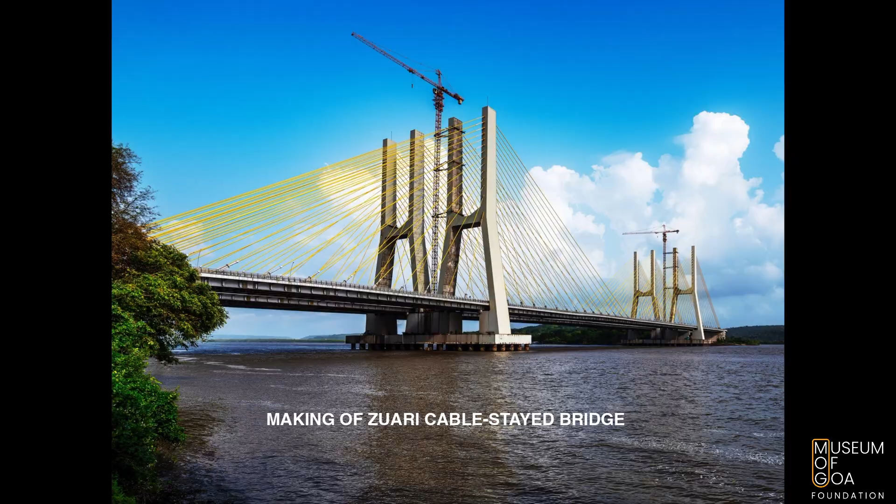So this bridge, as the name suggests, is a cable-stayed bridge. Some people even refer to it as a hanging bridge. Have you heard somebody calling this sort of cable bridge a hanging bridge? But in engineering terms, there is nothing called a hanging bridge. With cables, we normally construct only two types of bridges: one is the cable-stay, and the other is the suspension cable bridge. So these are the two types, but as an engineer, we never refer to it as a hanging bridge.

Now Goa has three other such cable-stay bridges. Do we all know about them and have we seen them? One more we know is Mandovi. Then there are two more - Aldona is one. That was the first one, done around 2004, when it was first opened.

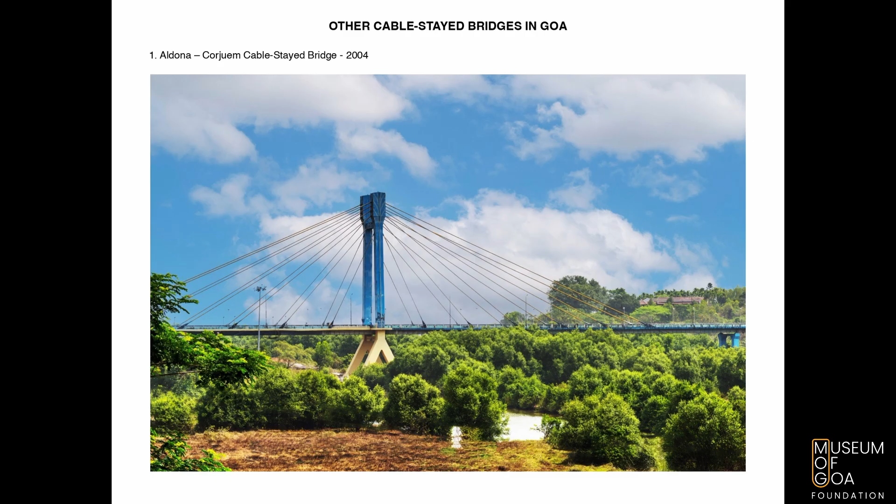So I will just show you quickly those two pictures also. This is Aldona, about 235 meters in length, with some 105 meters of navigational span on the right side. Then, of course, this is Mandovi.

Fortunately, I was also present in this project from the beginning. This is Mandovi, which was opened in 2019. Here the cable-stay part is 620 meters, whereas the bridge I'm going to talk about, Zuari, is 640 meters.

And the third one, other than this bridge, is from Sada to Varunapuri, in Vasco. But this bridge is not mainly for local traffic, it's mostly for the port. This way they are crossing the railway tracks as well as a road overbridge there - not a flyover. So these are the other three bridges here.

And of course, there is no suspension bridge in Goa. So now let us first talk a little bit about the difference between these two types of cable bridges: the suspension bridge and the cable-stay bridge. This is, of course, a bridge everyone knows - the Golden Gate Bridge.

So here the main difference is: you can see the cables which are taken up there, then going down, then some more cables hanging which are vertical - this is the suspension type. Those vertical cables are holding the deck, and the vertical load is transferred from this to the pylon, and through that it goes below to the ground.

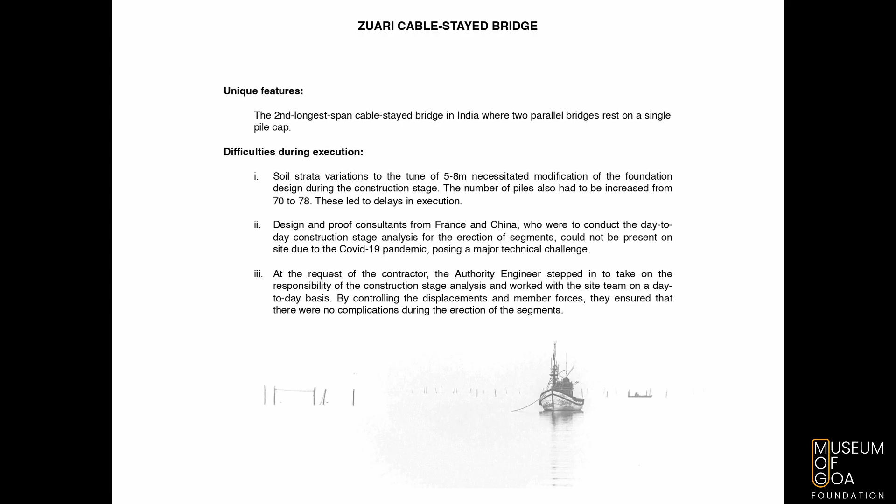At that time, when this bridge was completed, it was the second longest cable-stayed bridge in India. Now, of course, there are many more built in recent years. And there were a lot of problems while doing it.

The foundation size was huge, 89 meters by 27 meters by 4 meter depth. In that huge area, there was a lot of variation in the soil strata. When we started the work, we did some soil investigation, but being such a huge area, maybe the investigation should have been done at more locations. Because of that, we couldn't visualize how the strata change would happen, and the design had to be changed. While they were boring, we suddenly found the existing design would not work and needed more. So soil investigation was done again, which added to the time frame.

The bridge was designed in France, and the proof consultant for this bridge was from China. They were supposed to be here during the erection of the girders. At the time of erection, the bridge is always in an unbalanced condition, so every day calculations had to be done to tell how much force has to be given. This was not happening because those people were not here, due to COVID-19.

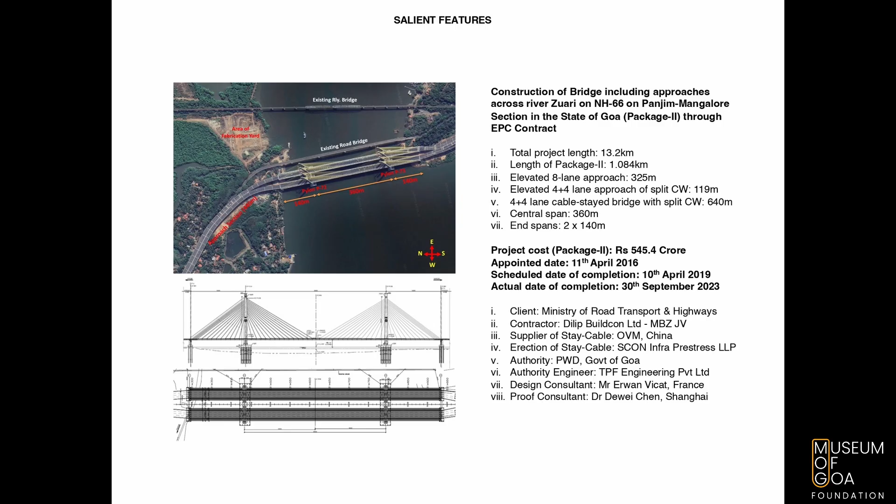I'll explain briefly since there are many things to cover. The total length of the bridge has a main central span of 360 meters, with 140 meters on either side, making 640 meters total length. This cost around 545 crores, with very little escalation, some 2 crores extra because they had to do something extra which was not in the contract.

This is what I was discussing earlier with a gentleman here. When this bridge was initially conceived, these towers were already under consideration and had to come up. When this proposal went to the ministry in Delhi for sanction of the project, they said no, we cannot give you money for this because it's a huge amount, almost half the cost of the bridge itself for these two towers.

They said, since the Goa government is going to earn revenue from this, we are not going to fund it. But since you have already taken these things into consideration while designing the bridge, you should design your foundations so that all the extra load coming from these towers can be taken care of, so that in future, whoever funds it can come and build on the same foundation. That's how the foundations became very big here.

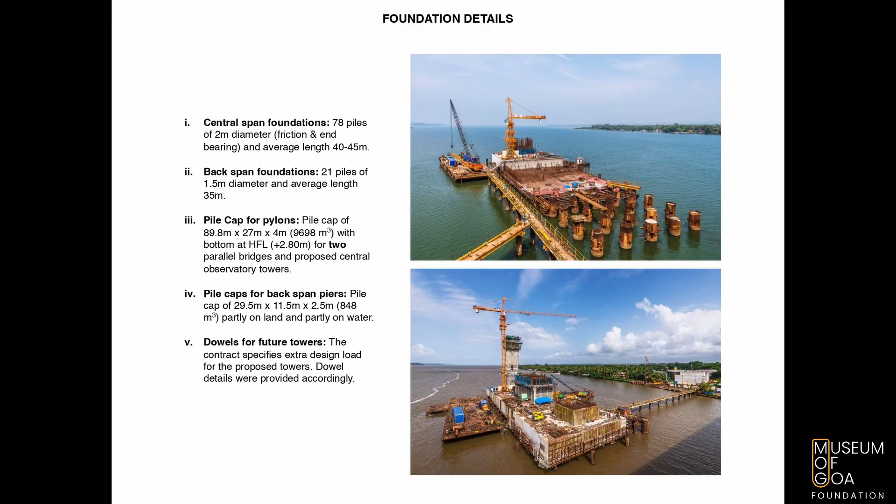Now let's come to the main bridge foundation. Both foundations shown in the photograph, the first one is on the Madgaon side, and the bottom one is on the Panjim side. These two huge pile caps are almost half the size of a football ground, 89.8 meters lengthwise, 27 meters widthwise, and 4 meters in height. It's a huge amount of concrete there.

Before that, we had to do the piling. The total number of piles in the original design was 70. Then, because of the variation in depth of the strata, we had to add another 8 piles in between, making it 78 piles total, along with the pile caps.

Notice that we couldn't pour the pile caps at one go for the entire thing, otherwise we'd have to wait for the whole thing to get complete. Also it would be a huge volume, about 10,000 cubic meters at one go, which is possible but it was easier to do it in 3 parts. So those were the changes we made during construction.

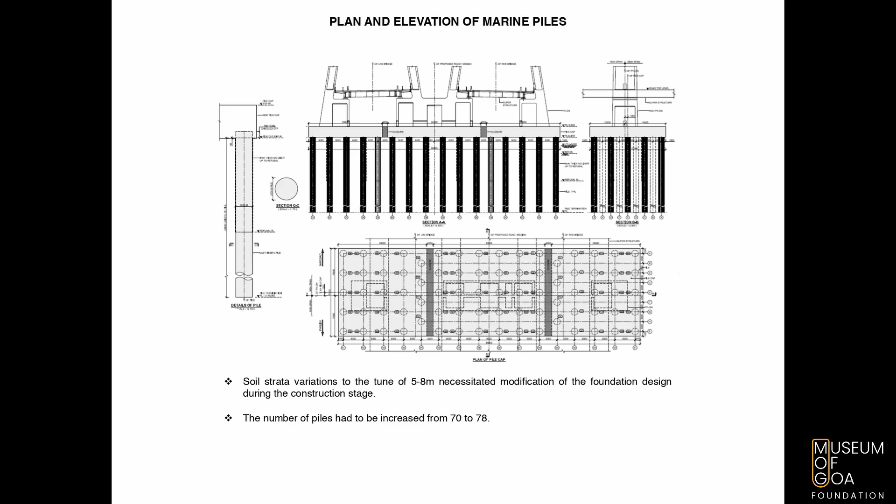This is the drawing of that. You can see there are 5 rows of piles this way and 14 rows the other way. In between we added 4 piles here and 4 here later, making it 78 piles total. These are huge piles of 2 meter diameter each.

So piles are like pillars? Yes, it's like a pillar, but inside the ground for the foundation, vertical.

Now we need to ascertain the capacity of each pile. While doing the soil investigation, we know the soil strata, and depending on that, if there's rock at the bottom, we call it an end-bearing pile which takes the majority of the load. Sometimes we design it as a friction pile combined with end-bearing. Here it was like that, both friction and end bearing.

From the soil investigation data, we could calculate how much load the friction would resist and how much from the bottom. Based on that capacity, we decided initially it would be 70 piles, but then we needed to confirm it by doing a test.

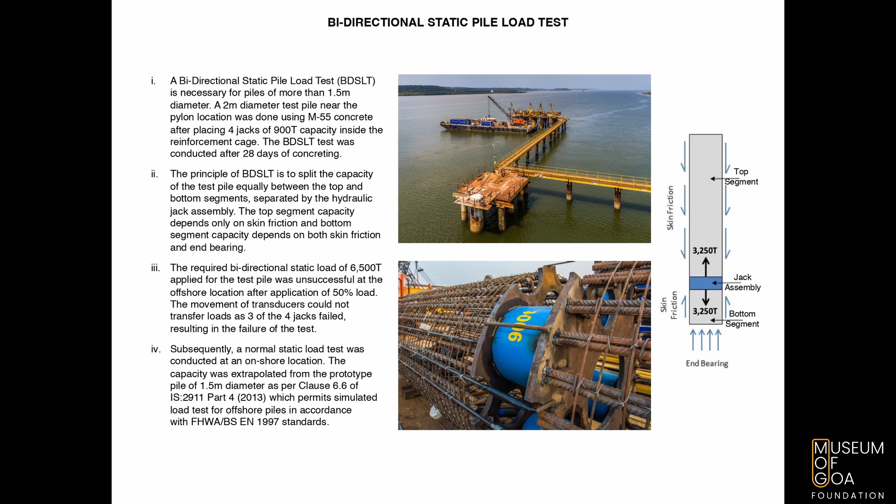This was one test that was done. Normally in bridges, piles smaller than 2 meters, up to 1.5 meters, are tested by loading a platform with weights, then putting a jack on top of the pile and applying load through the jack. The jack starts lifting the platform, and in turn the load gets transferred to the ground. That's how we used to do it.

But this was a different kind of mechanism. Here the jacks were put inside the pile. There were 4 jacks of 900-ton capacity, and this was our test pile, not in the main working area, a little away. This had to be done with full concreting, everything buried inside.

For whatever reason, maybe the electrical line got cut during concreting, this whole test failed, and we couldn't get any result from it. So we had to go for a prototype test instead, which is also allowed under our codal provision. We did that on a smaller pile outside, not inside the river, in similar soil strata, and extrapolated the results to get the capacity of the 2-meter diameter pile.

Is it becoming too technical now? A little bit. Okay, then I will go a little differently.

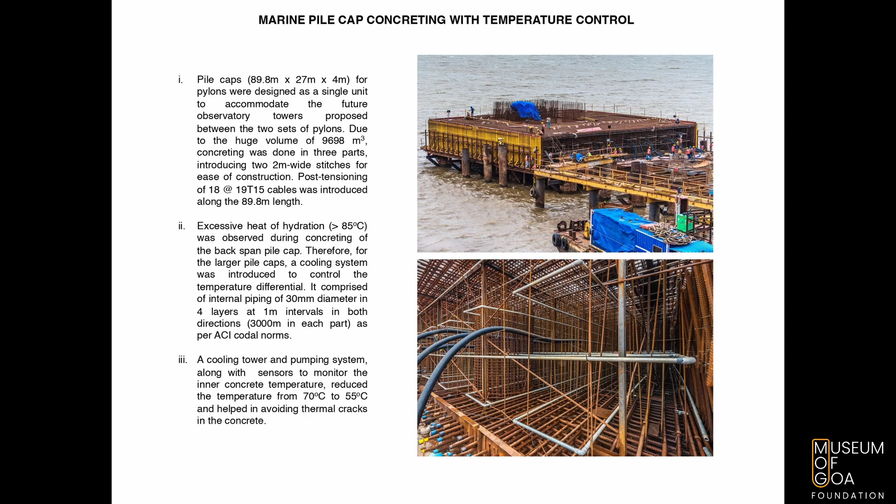Whatever I do on top doesn't help reduce the temperature inside, so this wasn't in our original plan, but we had to provide piping for pumping. We had ice cool water pumped through this piping so the concrete becomes cooler, preventing that heat of hydration and reducing the temperature difference, basically to avoid cracks in the concrete.

Since we did it in 3 parts, finally we had to put some cables here, which was originally not there in the design, to make it a monolithic kind of thing. That was also done, which came later.

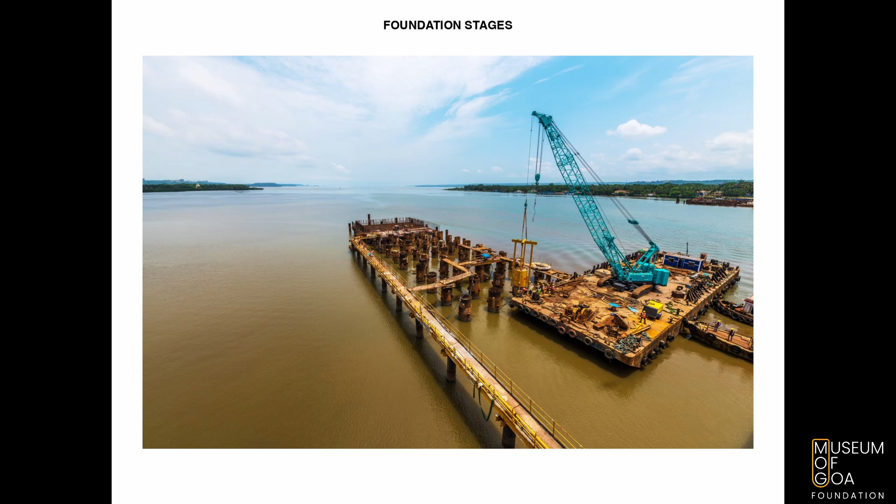I'll just show you some pictures. So this was initially we started piling. Then you can see the first part of even the pylon, this pile cap is done, even the pylon is starting. Then pile cap again we are getting it ready for the next, and here pilings are done.

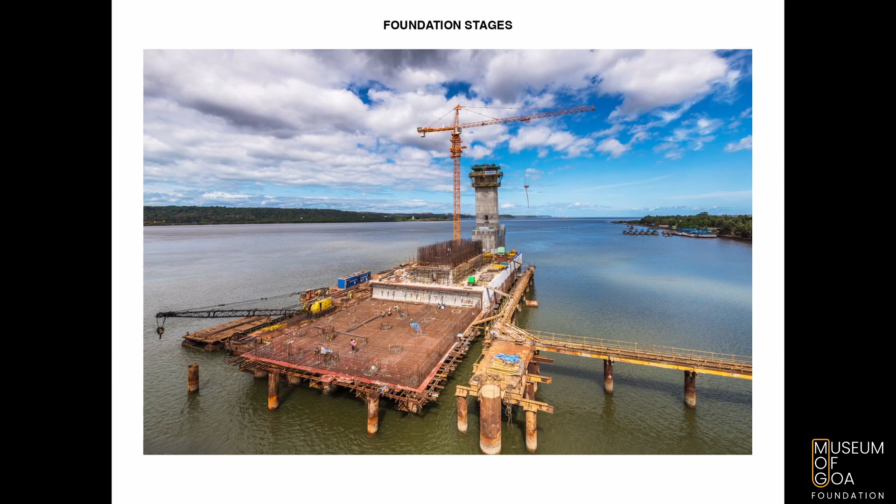And here also from the other side, the last part of the pile cap. Then here it is ready for concreting now. All these concretings were done through some pipelines. Everything was at the bank of the river, so it was pumped from there right into this.

While doing all this work at site, we had the huge things to be done, the superstructure and steel. So for that, we had to set up one fabrication yard near the site, and we'll just talk about that quickly. This was the facilities that was created there.

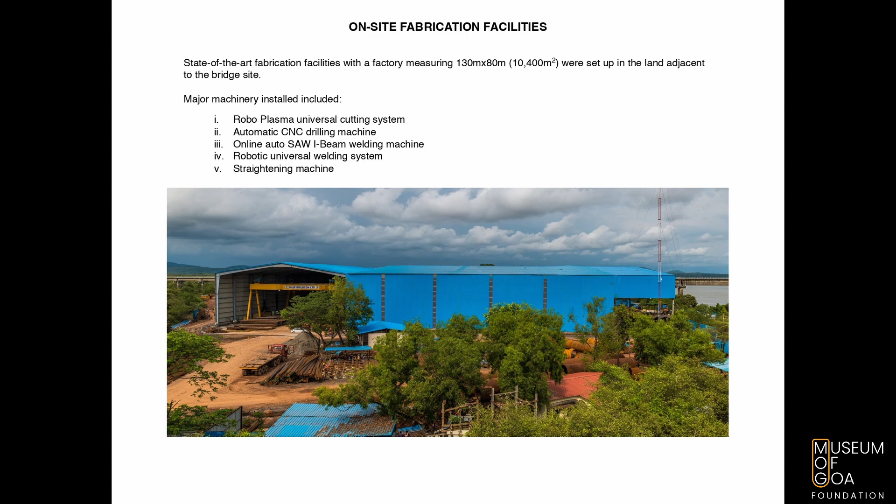This is about 10,400 square meters of area with some major machineries like this, for cutting, then drilling, then welding - all kinds of these machineries were all inside there, just adjacent to the site. This was the interior of the factory.

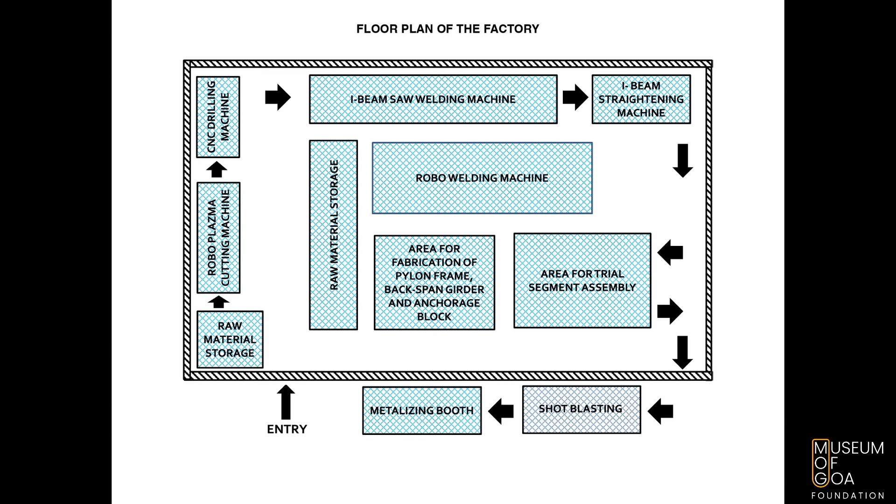There's another image - all these steel plates are kept there. And then this was the floor plan. From one side, the material used to come, and after cutting, drilling, then welding, it used to come out. Then it was again shot blasted - those I will show you in the photographs.

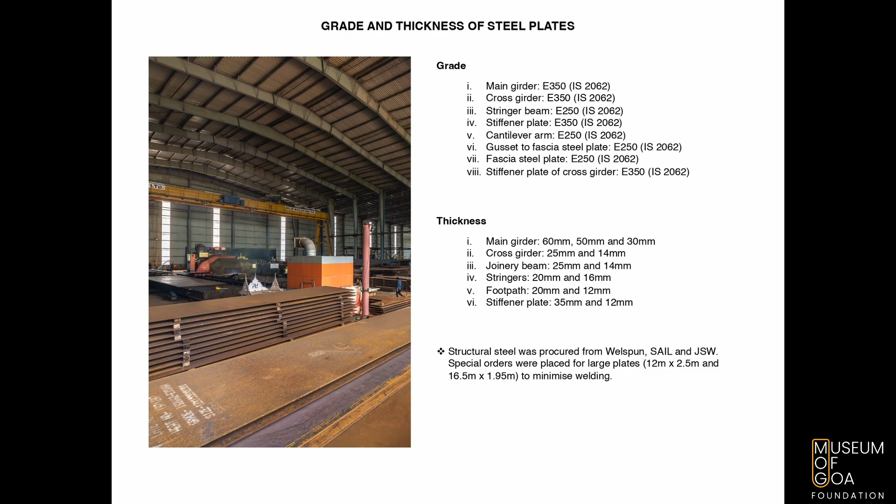With this, the machine used to decide how to cut the plate so that we can optimize and minimize the wastage of the steel. And this is the drilling machine.

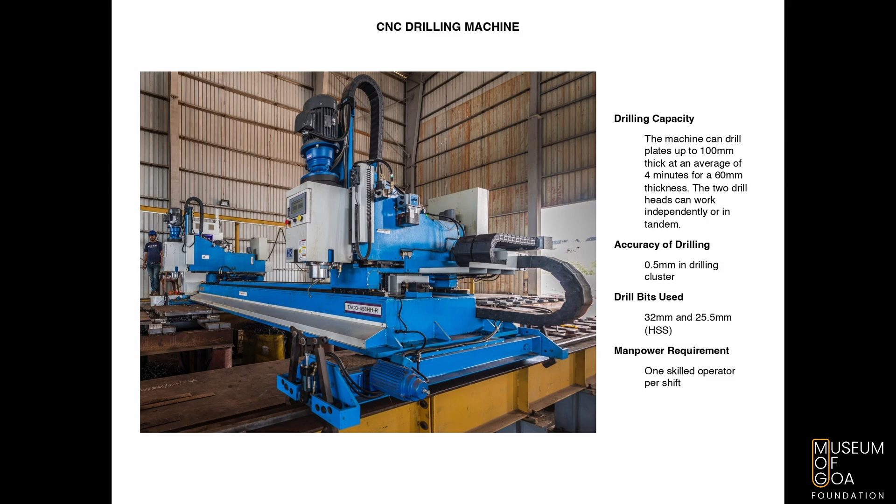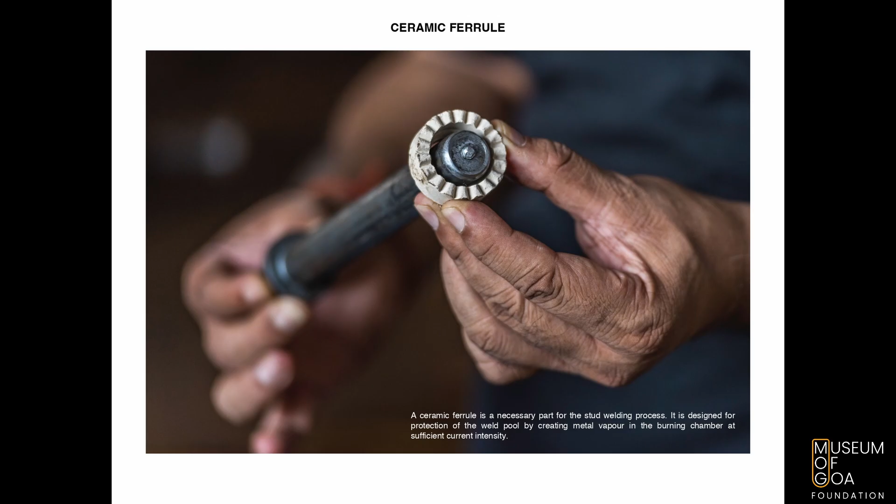And this is, at the start, there is something called a ceramic ferrule. So what happens is this point here melts, and also the material of that beam, or wherever you are connecting, also melts. But during melting, this just protects that area, so that it can fuse easily.

And this is the shot blasting happening here inside a closed chamber. We put some small metal shots with very high pressure, so that all the scaling and a little bit of rust comes out. Then you see, after the shot blasting is done, even the color of the steel has changed.

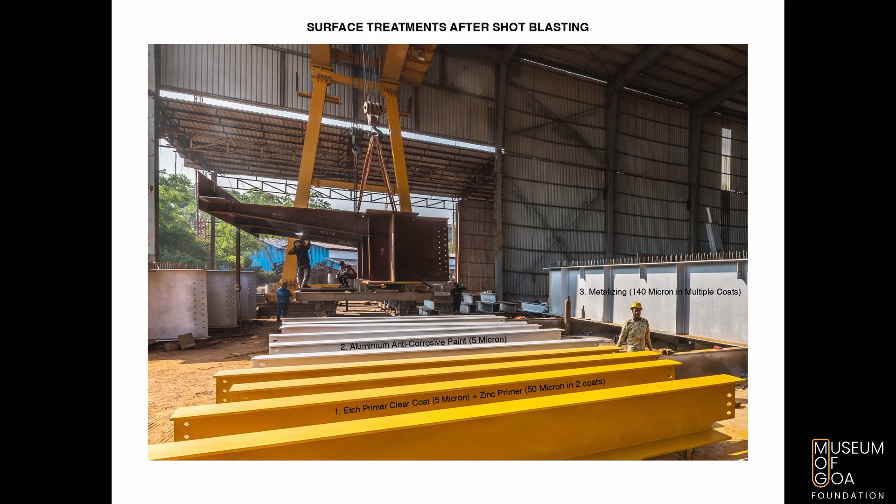Then we apply these different coats, the protective coats here. Then this is the last coating, this is metallizing - here this wire is getting melted, and with some air pressure, it is applied like paint there.

Now this is the pylon, as you have always seen in the bridge. I will just go quickly, okay? I will not explain too much of the technical thing. This was done in 3 parts.

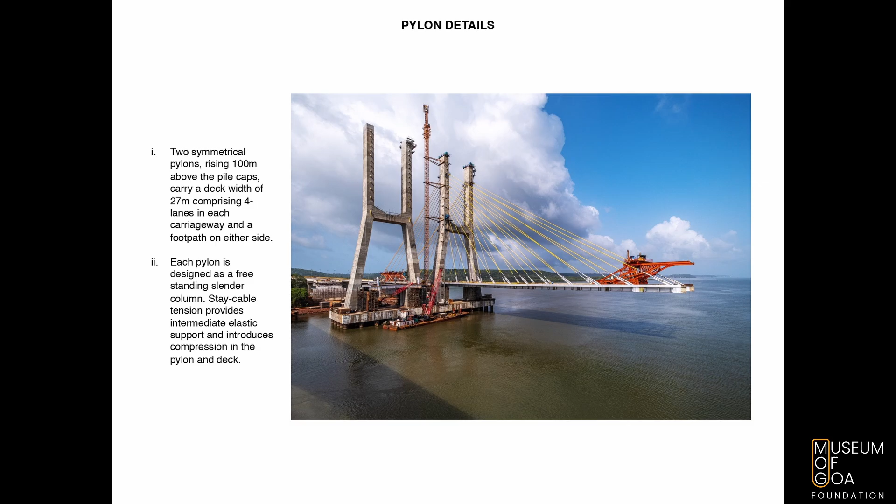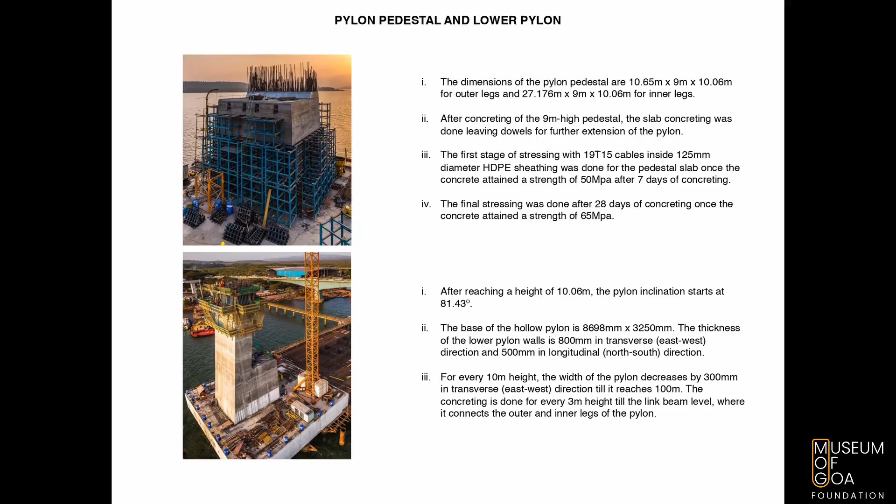This is the bottom part, we call it pedestal. Then this is the lower pylon, from the pedestal up to the tie beam level. There is a tie beam at the 50-meter level. So up to then, it is the lower pylon.

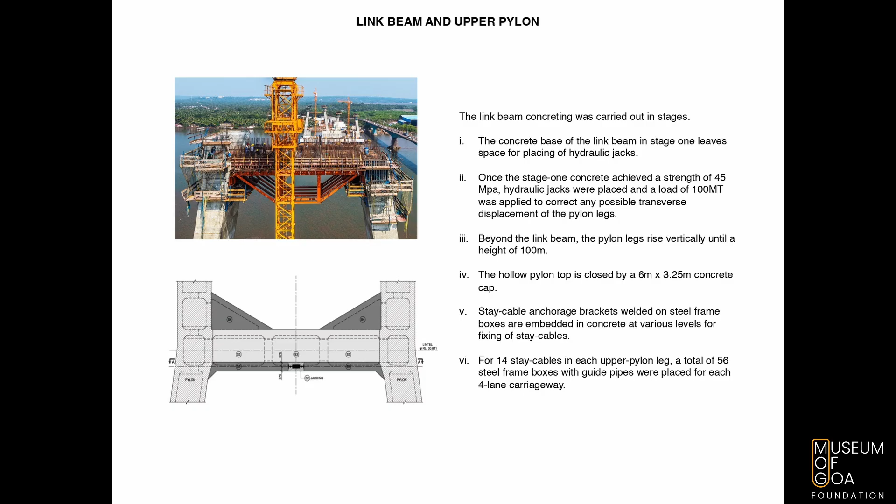Then it goes up. This is also, I am just showing the formwork of the pylon. Then here is the beam. By the time you come up to this beam level, because these 2 legs are inclined, there is a chance of them coming closer at the top.

Because of that, before we start doing this concreting, we put a jack here. We do 2 parts on both sides. Then with a hydraulic jack, we give force so that whatever correction we need to do is made before we go further, because we have to go another 50 meters above this level.

So we correct those things, and then finish this entire concrete and go ahead to the top. You were seeing those cables when you travel at the top, and also seeing the cables coming down. You see only this yellow part, right? Inside each pylon, there is a huge steel frame where all these cables are anchored. The stressing is also done from inside, because the entire pylon is hollow. From outside you cannot really make out whether it's hollow or solid.

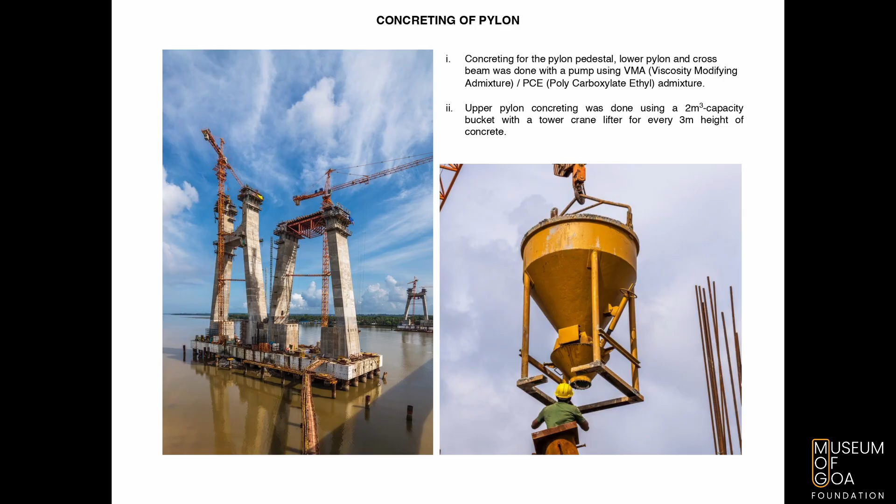And the concreting, as I told you, up to this 50-meter level, was all done by pipe, by hydraulic pumps. Above that, it was all done with buckets which were lifted through the crane, with some 2 cubic meter capacity buckets. Because these were all small lifts, we were doing 3 meters at one go.

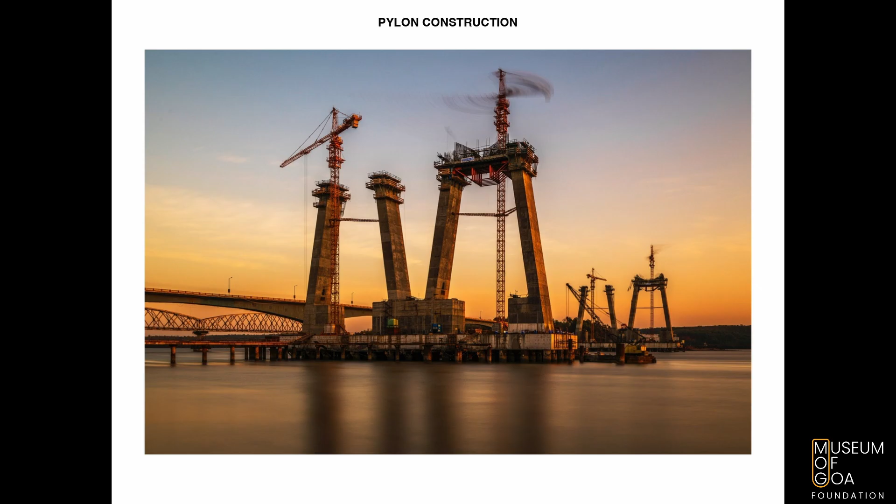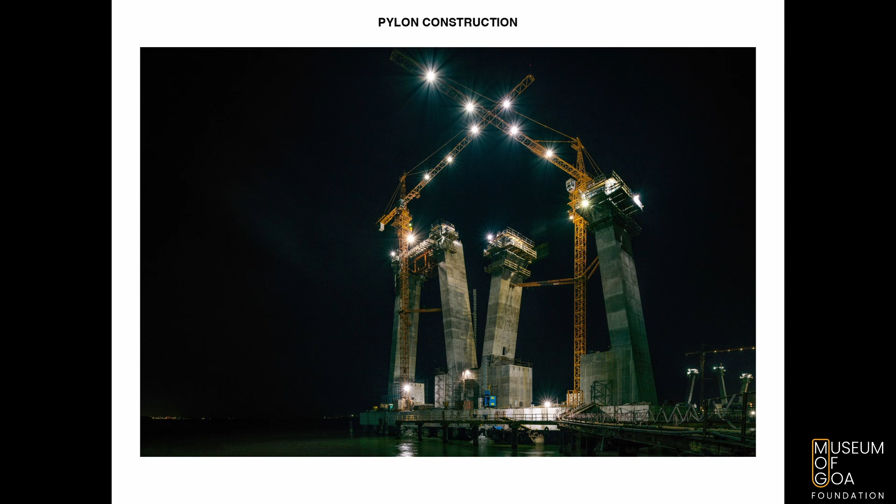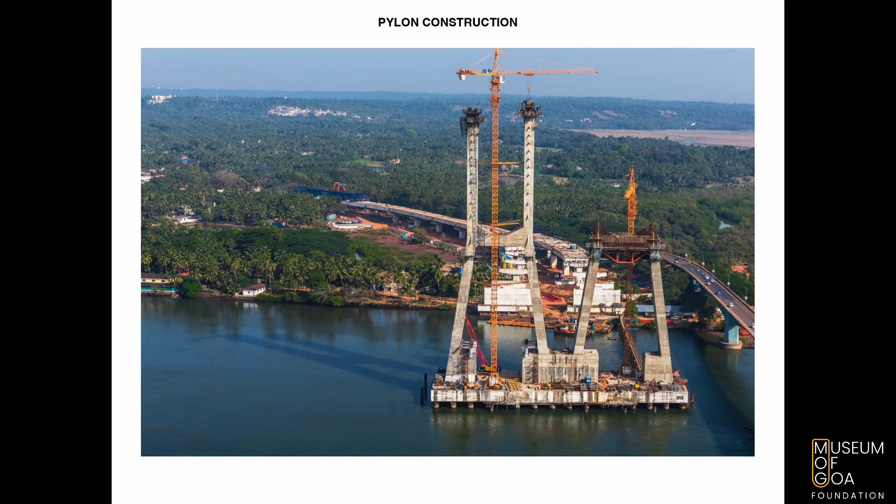Okay, we are now building the superstructure. Also, the elements are in the fabrication yard, inside the factory. And now I will just talk about the superstructure a little bit. When you travel and look at the bridge from the side, you really cannot make out that the beam is so high. This is 2 meters high.

You can see the man there - there is space up there. This is only a small part, the footpath area where the bridge has a footpath section. This is only for the footpath section, where the total width is 27 meters here.

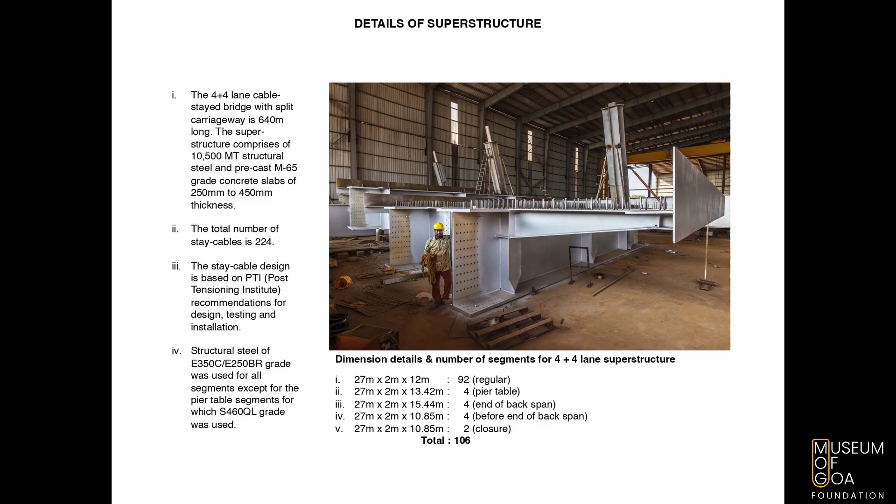And in total some 92 segments were done. Of the 106 in total, 92 were with a very regular dimension, which is 12 meter, 27 meter. Some of them were with a little different dimension to bring it to the correct length. So 106 segments in total, each about 100 tons. That much fabrication work was done there.

Finally, while designing, we have to design it for some drag coefficient and things like that. So whatever we assume while doing the initial design, that time we assume something, because for each area we already know the wind velocity. So based on that we do it, but we need to again confirm, depending on the section of my bridge. So these tests are done.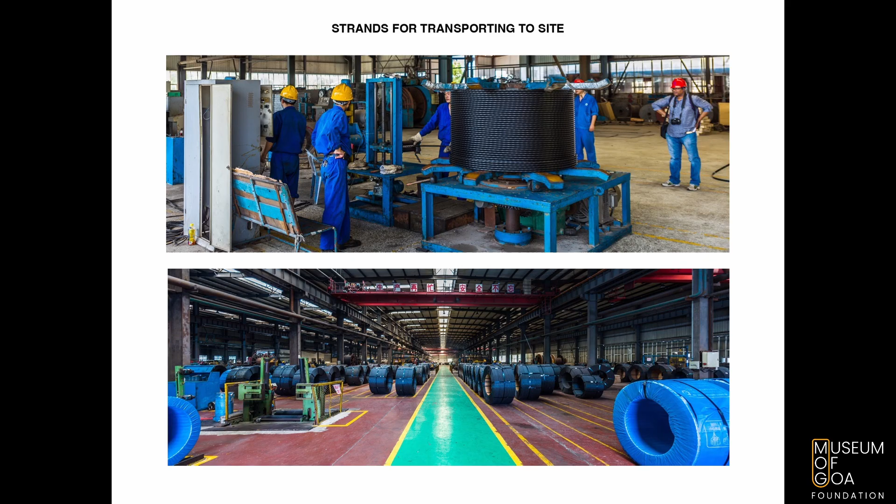And all this, the main part of the bridge - whatever cable part - all were procured from China. And luckily we could procure it before COVID. Before COVID itself, we purchased everything, and everything came here. Otherwise it would have been another problem for the material.

So this is the factory where all these strands were made. I will just show you now - these are the strands, which are inside those yellow cables. Whatever you see is the yellow cable, but inside these cables are there - these are the strands which are inside those cables. I'll show you where. And this is another factory from where all this anchorage is, where you finally lock those cables at the end. These are the anchorages.

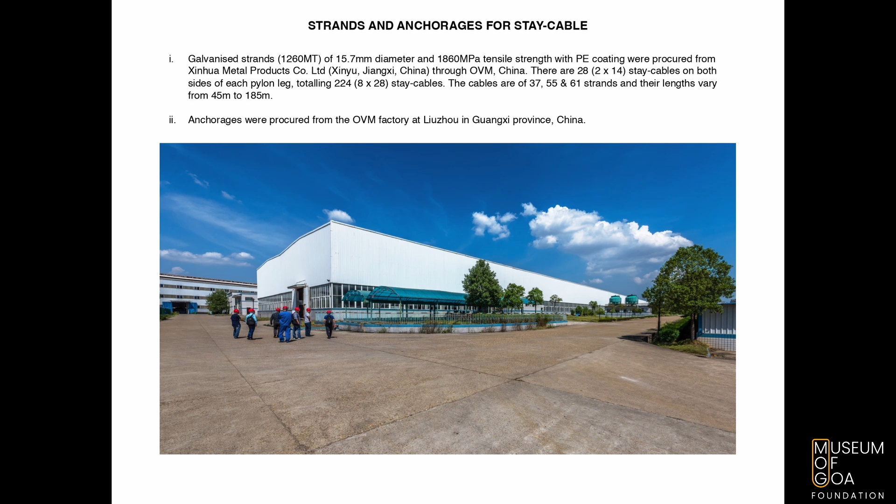For this also, you have to do some tests for all these cables. This cable test requires a higher number of strands because the total load on the cables is much higher. There is no facility in India to do this test; you can only test maybe 1 or 2 strands here.

As I told you, this is the anchorage where these cables are fixed with wedges on the strand. These are the strands. So this particular test, for the lowest size of cable which had 37 strands, was tested in China. They had a facility there.

These cables are tested for 2 million cycles. That means, like I showed you, it keeps moving like this for 2 million cycles, and we check what breakage occurs. We go up to 95% of the ultimate tensile stress of this steel.

That is a property of this steel. We go up to that point in testing, but while designing this sort of bridge, they only allow you to go up to 45%. So you can imagine how much margin is there, so even if some accident occurs and one cable snaps, nothing will happen to the bridge.

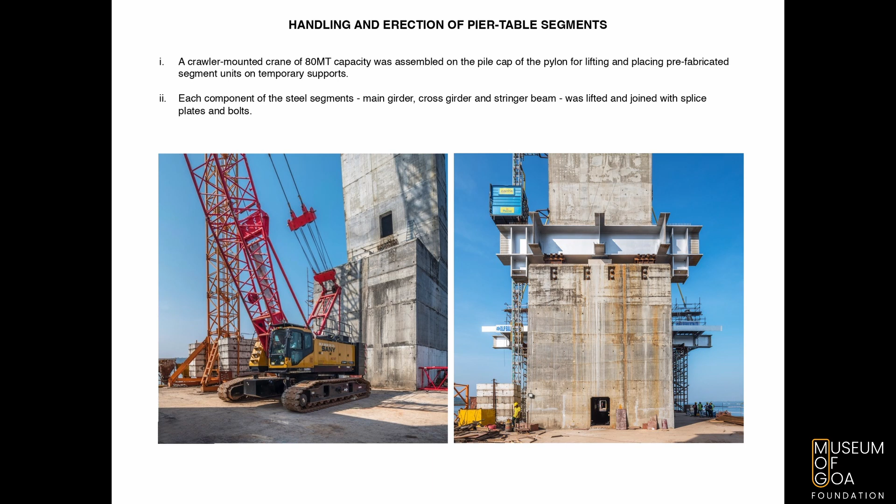So for this erection, I will show you the pictures now. See, these are the steel frames which came; you bring them there and put them initially on some support, because you have the pile cap there. Then we start putting all these slabs.

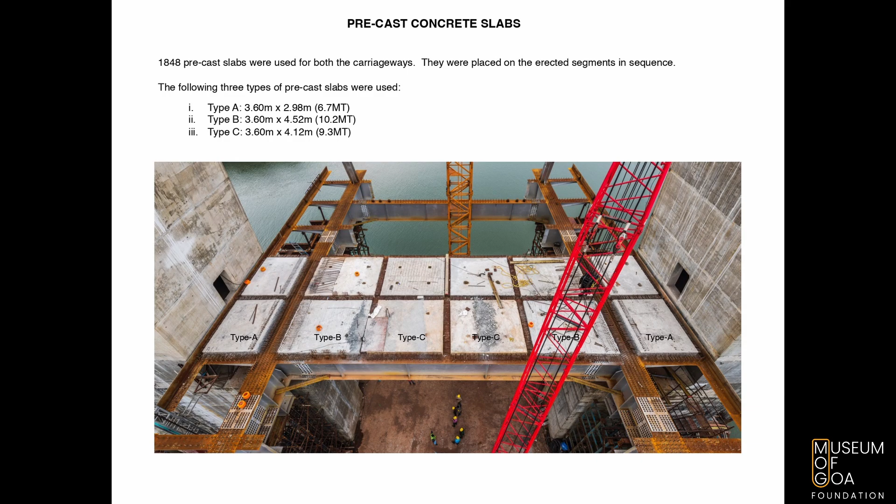These slabs look small, but this is a 10.2 ton one, the biggest one. Then there are some smaller ones in the footpath area, so here it is a little less.

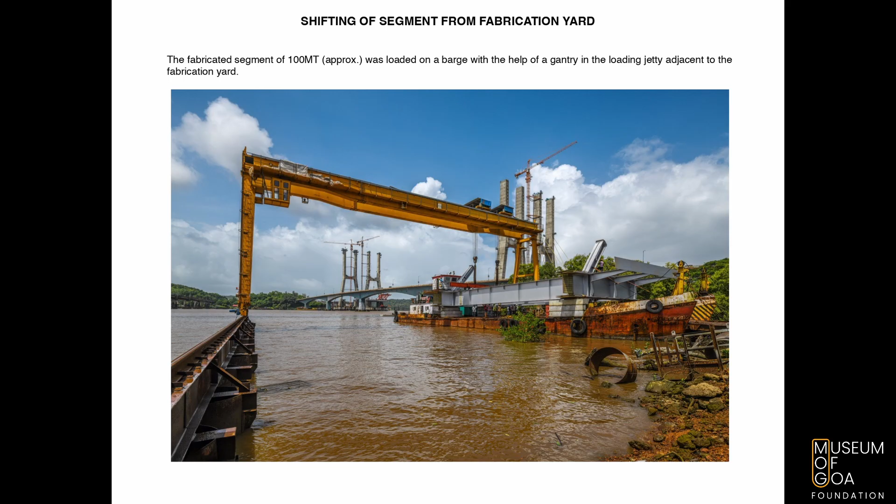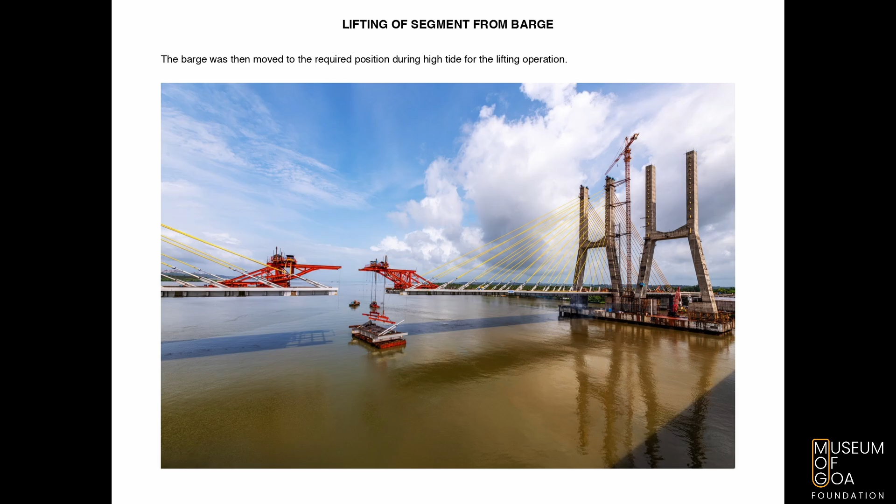Then our factory was here, so from the factory, this is how they take it inside. Then you take it there and start lifting. This is the lifting, how it's happening. Then you keep connecting those after lifting.

Then all the slabs come, and finally you stitch all of them to make it look uniform, so everything matches. This is what I was talking about with the Chinese and French people who couldn't come. So this is the procedure through which we keep lifting one by one.

Every time you lift one unit and connect it, we need to observe all the levels and also the force. Because being in cantilever, it always tries to droop below, so you have to correct it before the next segment comes.

After doing the survey, we tell the designer, in our case in France, but he couldn't respond because of COVID, so it was done here. The designer would tell us we need to stress this cable a little more, then only it will come up. There was a big mistake: every time, whatever the design specified as the expected deflection, we were always getting a higher deflection, and we were wondering why it was happening.

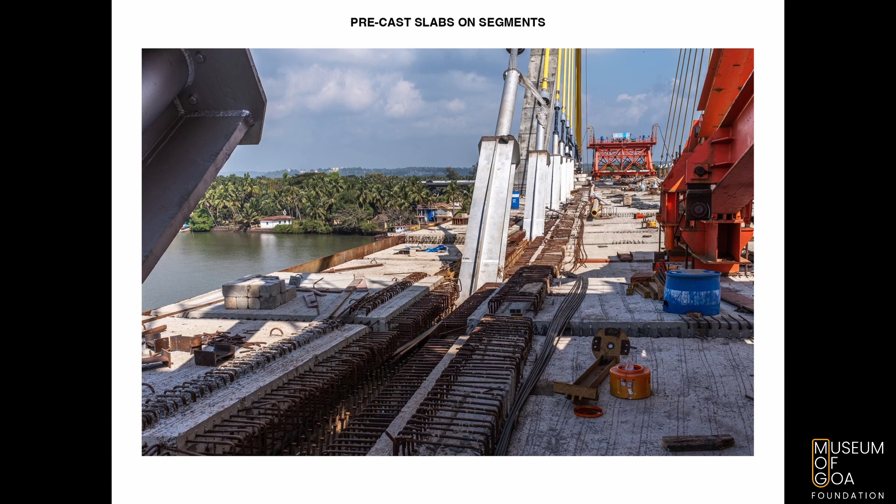This precast thing, normally what happens whenever in concrete, we calculate the weight. We take the volume and multiply by 2.5 to 2.6 within that range. But in this, there was so much steel inside, it was much higher. Because of that, the load coming was much higher, so he was designing it for a lesser load. Then how we came to know, we had some doubt, maybe this was the only reason. So we took them and started weighing few of them. We said, it's because of that, and then we could correct it.

So many things happen, but during execution you need to be a little cautious about why it's happening, then you can correct it.

You mentioned stitching between the segments. What do you mean by that? Stitching between them, that's a concrete basically. This is a stitching concrete. These slabs have gaps here, so this will have to be filled with concrete.

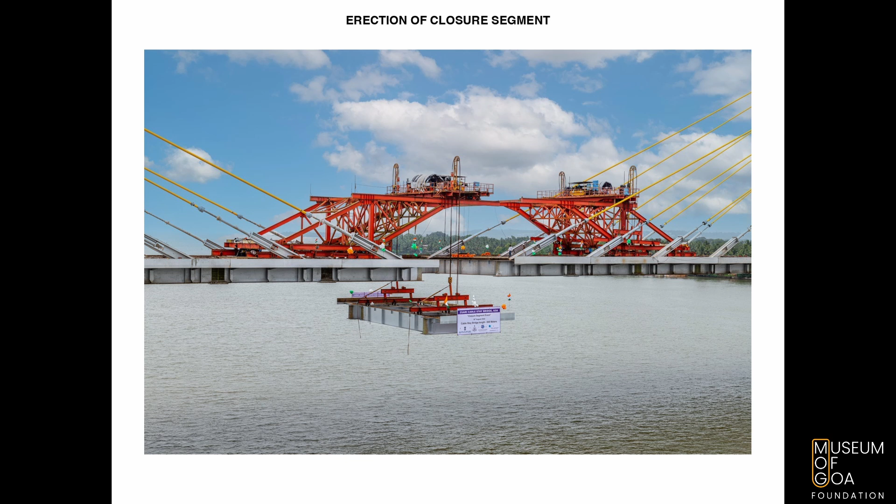Now here also, you see, everything is happening. Can you notice this side is a little up, then this side is down? Yeah, so but finally we have to make it at the same level, right? This is the last segment which is coming up.

Here it was much easier to do because of this load, of this frame. This is the temporary thing, it was for lifting purposes. So we shifted, we brought this one forward, this one little backward, so that it balanced, then we lifted it and bolted it.

People were talking when they saw that at the last stage. Then these are the bolting, what they do. I'll go quick, there's no time.

And these are the yellow cables you see. This also comes in certain sizes, then they weld it there at the side, depending on whatever length you need. So it is done, they cut it, heat it up, then weld it hydraulically, they press it, it gets welded.

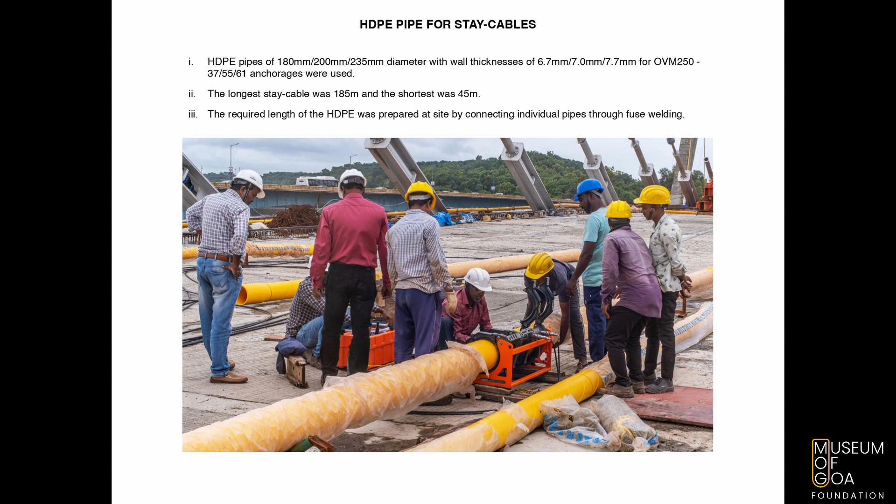Then this was the first cable, not cable actually, only the outer cover, the sheathing, they were lifting. Then from this, at the top, the cable, all the strands are lifted, put into that machine up there, they coil it. Then one by one, they put it through the tube which comes down at the deck level where it is connected, so it comes here.

On the right hand side you see this is at the deck level. So this is the fixed end, then this is the top end, the stressing end. This is inside the pylon, and even now I can go there inside. There are some steps, ladders there, so we can go and inspect how things are.

And these are, of course, too much technical detail, so I will just skip this.

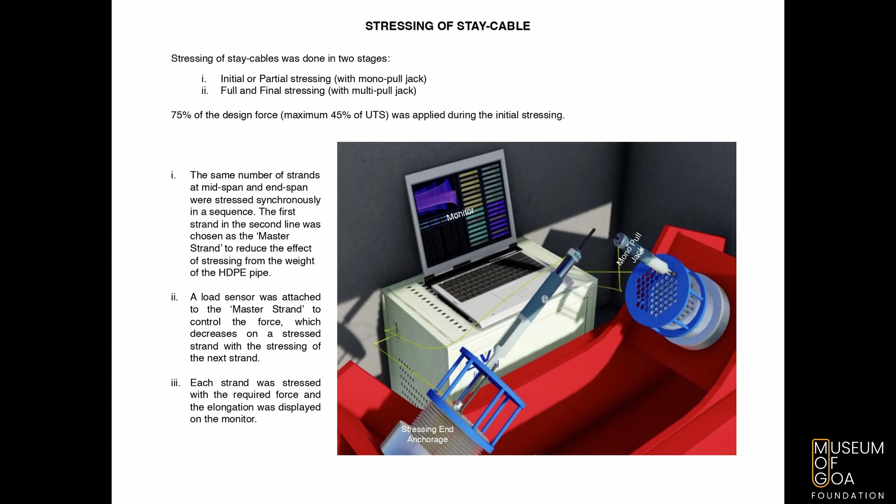And you see, I was telling you, every time after putting all this stressing, he is again taking the levels, whether this side is down or up, so that for the next segment we need to correct it beforehand. These are the machinery with which we stress.

Then this, I was telling you, the stitching. All these slabs, which were in precast, are all connected now.

And this is the last span. So here what happens, this bridge, as I told you, this central span is 360 meters, end spans are 140. So 360, half of 360 is 180, so this side is smaller. But all these cables cannot be less on this side, everything has to come this side also. So here you can see all these cables are at a very close distance, and we need some more extra dead load on this side. Because of that, this part was not with this kind of segment, it was filled with concrete to give that extra load there, so that it's balanced.

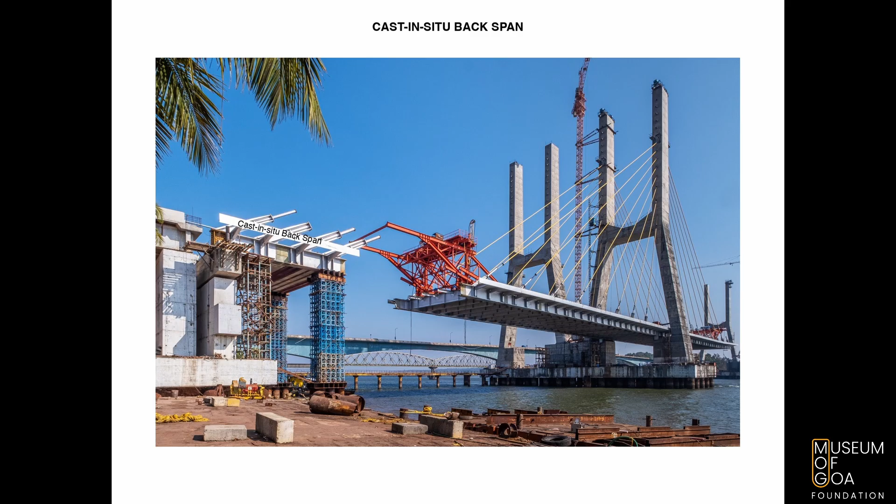And here, this is the back, so here they are doing the cast in situ concrete. Then this is the reinforcement there.

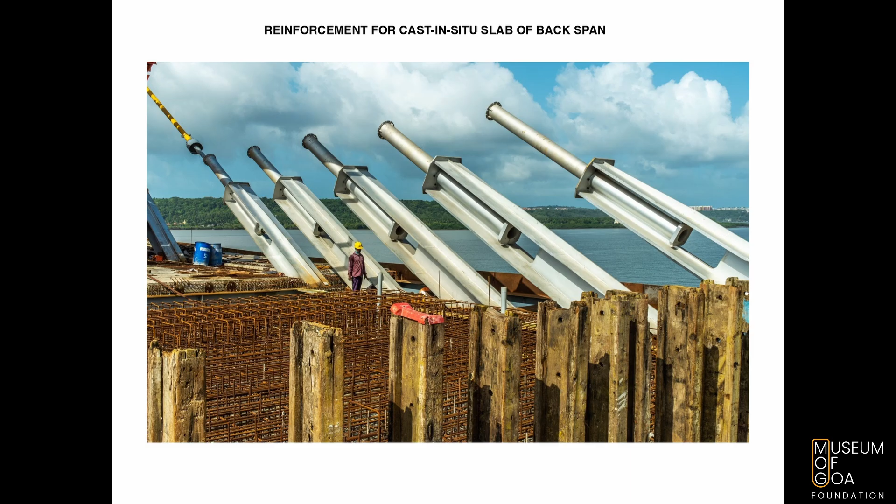Then one more thing happens because of that imbalance, so we need to put some tie beams, some cables here at the end. This they call the anchor pier, where I am anchoring the entire cable structure, because this is the end of the cable structure. So here I am anchoring the whole thing, basically, otherwise it may try to lift sometime because of the loading.

So it's there. Then this is the expansion joint, and that bridge has only two joints, one at both ends, 640 meters apart.

Then some pictures of this superstructure when we were launching. I'll quickly go through.

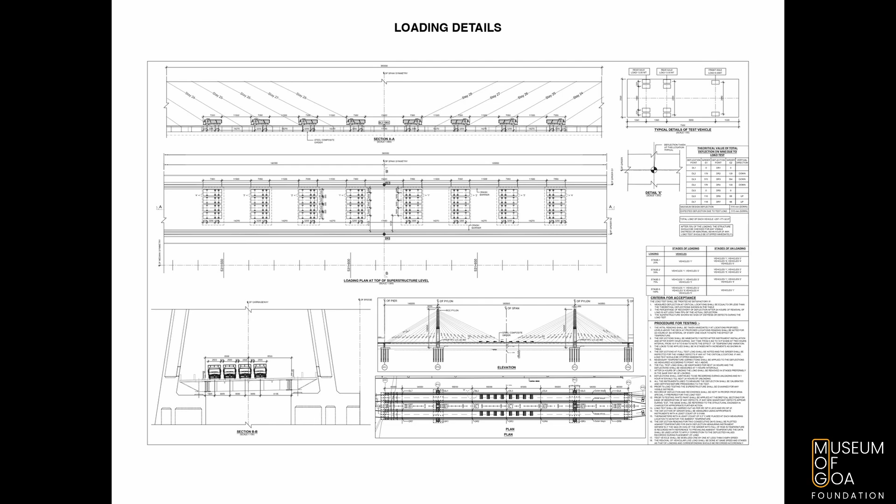Better you look at the picture. So here you can see there were some 32 trucks, each truck was 32 tons. So about 1,024 tons was at the center.

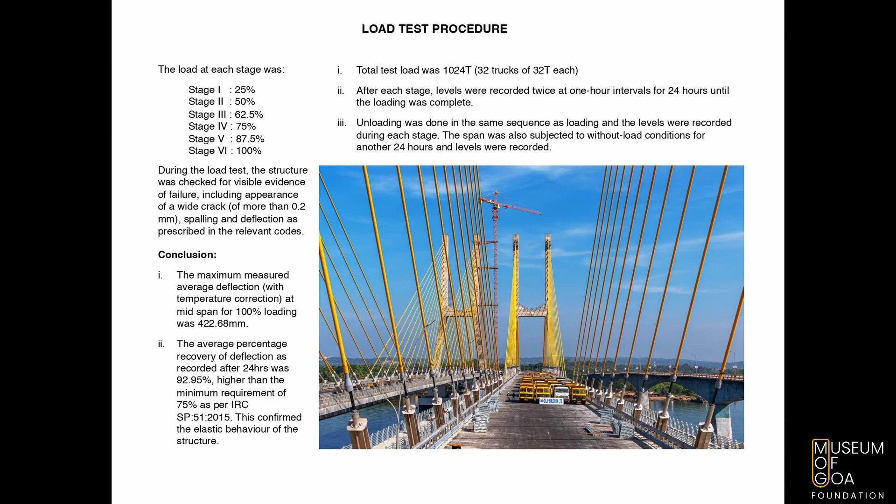It was put in stages, of course - from say 25% loading, then hold it like that, then take the level, then go to the next. And before we did the test, what we calculated, we found at the center the bridge can sag by 500 millimeters, 50 centimeters, okay? But the main thing is, how much it sags is one thing, but how much it comes back - that gives the elasticity of the material.

That it can come back, that is required. If it cannot come back, it means it failed, then you have to discard the bridge. Really - say you just take a plastic thing, hard plastic, you bend it, it just cracks, okay? When it is elastic, it will bend, but it will not crack, it will not fail, okay?

So that's what the test is for. So we got our deflection was 422 millimeters, okay, and it came back - minimum 75% rebound should be there as per code, and we got 92.95%, so it is okay.

So that is why whenever you are on a bridge, any bridge with a longer span, you are standing on the footpath, some huge truck or something goes, it vibrates. So you shouldn't feel worried, even in the car. Sometimes people think it's vibrating, something's wrong, but it should vibrate - if it doesn't vibrate, someday it may fail, and without giving any warning.